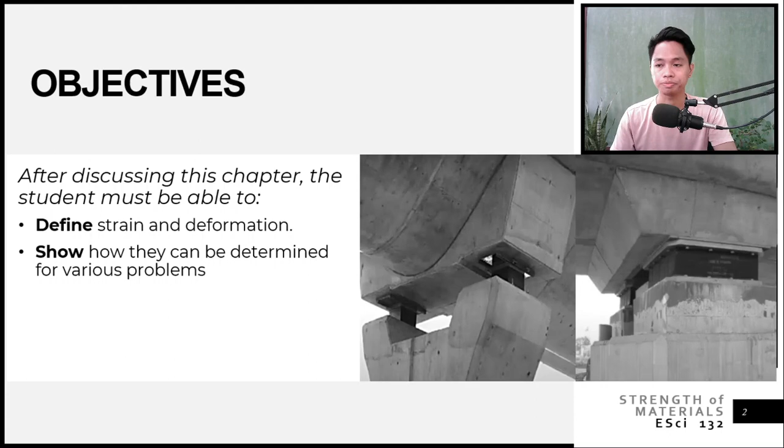So let's start. Deformation and strain: we are going to understand the concept of deformation, which is the main concern of strength of materials, because again from the course title itself, that is mechanics of deformable bodies, diba? So materials deform. That is why we are going to investigate how we determine the deformation of a material, and that would be our basis for how strong it is to resist our applied loads. And then understand the concept of strains.

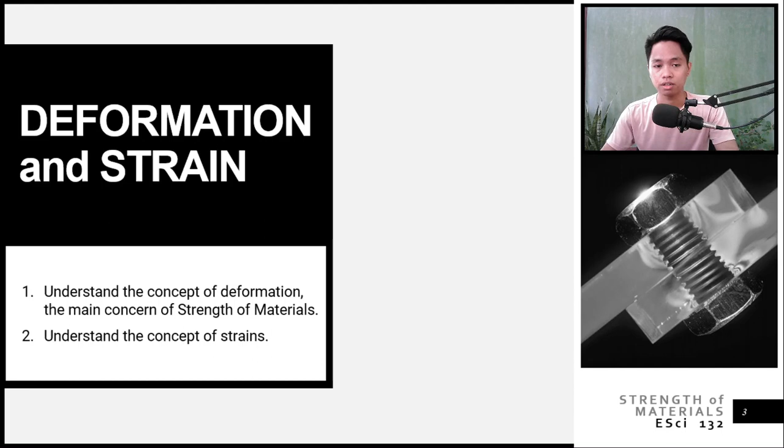Okay, so as per module 1, a deformation occurs whenever a force is applied to the body. Let's talk about deformation first. So a deformation occurs whenever a force is applied to a body. So there might be a change in shape and also a change in size.

So as per module 1, when we apply force to a body, dili lang stress ang iyahang experience. In the previous module, we know that during the application of force, by the formula force over area, it will give stress. The body will experience stress. So dili lang stress ang iyahang experience, but also deformation.

Alright, so the best example for deformation is your rubber band, lastiko. Your rubber band will undergo a very large deformation when stretched. That's the reality. Now, it may be too obvious or too small to be noticeable. For example, this rubber band, kung ato siya inaton, obvious nga mo-deform siya. But for our structural members, like beams and columns,

when we apply loads to our member, there are actually deformations, but they are too small to be noticeable. Di nato ma-observe tungod sa iyang kagamay. So, deformation will not be uniform throughout the body. Thus, deformation may vary along the length of a body or material.

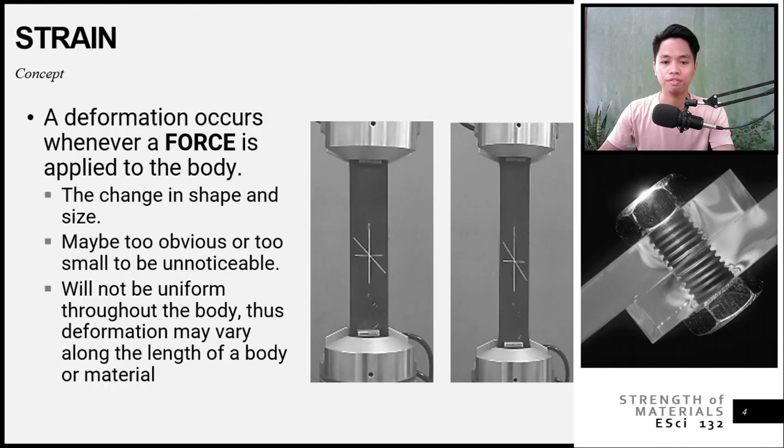So kung ting init, sakto na siya sa iyang sukod. Di ka maglisod og sira. Pero if muuwan or ting tugnaw, maglisod na jud og sira. Maglisod na ka og close kay huot naman siya. So there is a figure, and we have three positions.

We have your vertical, we have your horizontal, and we also have your diagonal. Alright? So kani before ni siya sa application sa ato ang load. So this is before the application of our load. So after the application of our load, kabantay mo nga ato ang vertical line is medyo elongated, di ba? Medyo may taas siya. And ang atong horizontal line is shortened.

So sorry for my voice kung medyo husky kay nagkasakit ko, so medyo lain akong tingog.

Anyway, ang atong horizontal line is medyo shortened, and ang atong diagonal line is medyo milahi siya angle. Mi change ang iyahang direction, and ang iya pod length is mi change pod. Okay, so that is an example of our deformation.

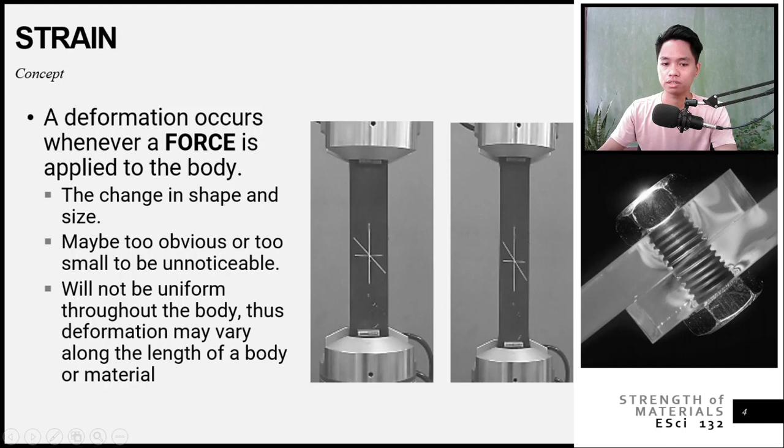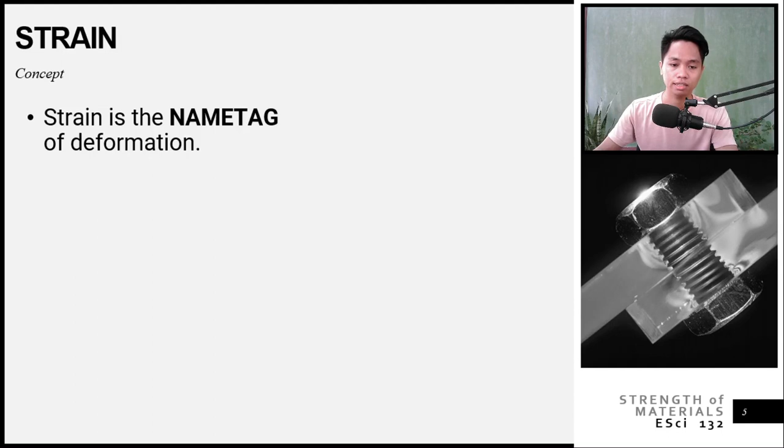Okay, so strain. Now, let's talk about strain. Strain is just simply the name tag of deformation. So, mas dali nimo ma-imagine ang deformation if naa si strain. So, we have two types of deformation. Of course, because sa stress, diba? Sa atong stress, we have your normal stress, and we also have your shear stress, di ba? Sa atong module 1.

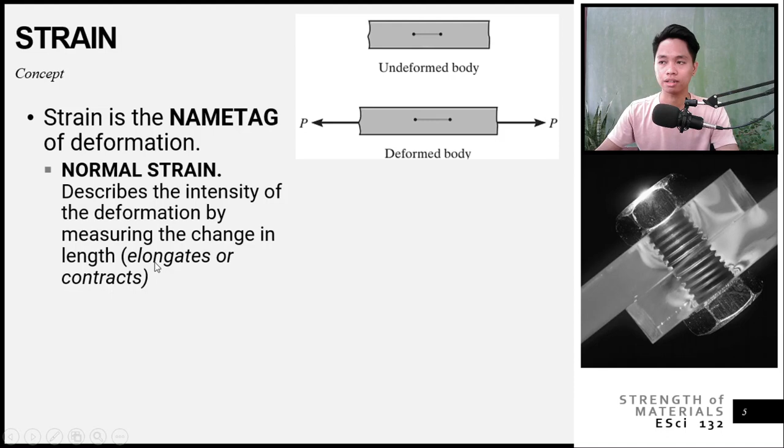Now, diri two types of strain. We have your normal strain, describes the intensity of the deformation by measuring the change in length. So, kung nag-elongate ba siya or nag-contract. For our shear strain, it describes the intensity of the deformation by measuring the change in shape or the angle. So, kung right 90 degrees na siya, pi over 2, nahimo siyang acute angle or obtuse angle. So, change in shape and change in angle. That would be our shear strain.

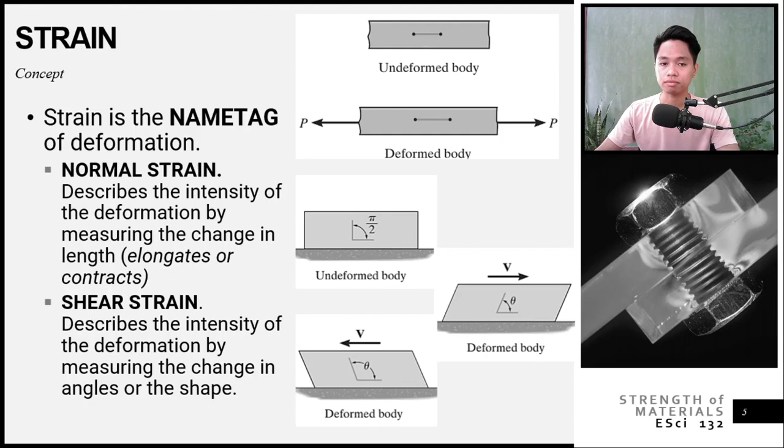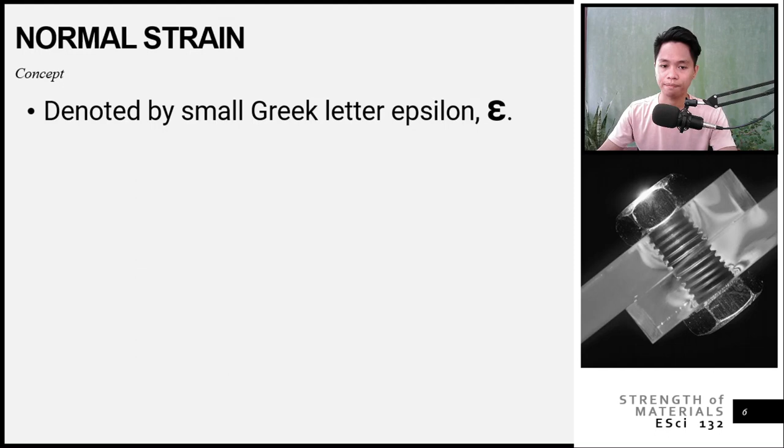Alright, so medyo self-explanatory. So, let's talk first about normal strain. Your normal strain is just simply denoted by small Greek letter epsilon. So that is defined as the deformation of the bar divided by the original length. Mao ni atong working equation for normal strain. Deformation divided by the original length.

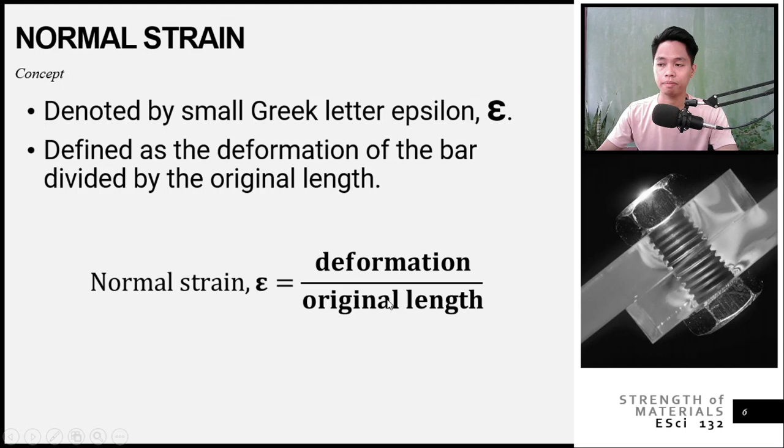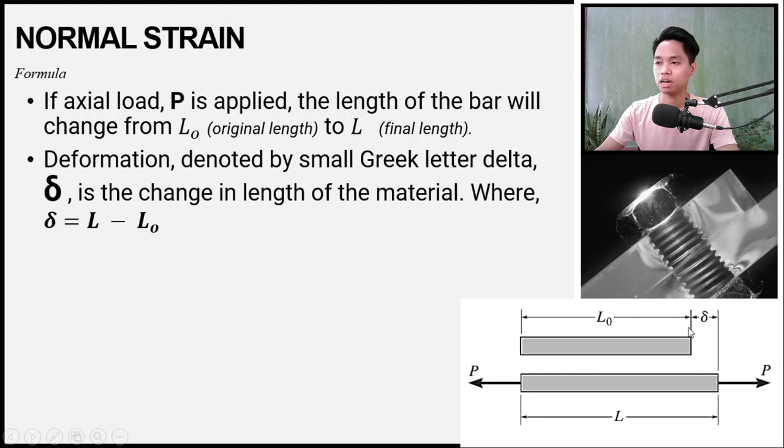So let's talk about the formula. For example, kaning figure sa ubos. Atong original member, L sub O, our original length. Now, after the application of our axial load P, the length of the bar will change from your L sub O, which is your original length, to L, which is our final length. Now, deformation, denoted by small Greek letter delta, is the change in length of the material. So, by using the formula, that would be L minus L sub O.

Okay. So, therefore, our normal strain can be expressed as deformation divided by the original length. So, therefore, strain is equal to delta divided by the original length, or L sub O. And we can express this delta as L minus L sub O. So therefore, this would be our final formula for strain: L minus L sub O over L sub O.

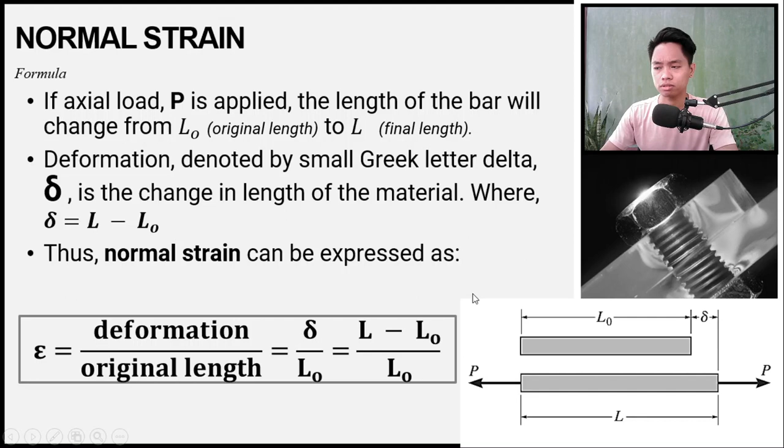Okay. So I hope that's clear. Because the deformation is a unit of length, say for example, meter, tapos ang atong original length is meter pod, diba? So length over length, ma-cancel siya. So therefore, our strain is a dimensionless quantity. Hinumdumi na siya, dimensionless quantity.

Pero sa uban nato problems, makakita mo nga the strain is equal to 0.004 mm per mm. Mao na siya usually ginagamit. Gina-express lang niya nga in every millimeter naay deformation nga 0.004 millimeter. Mathematically, ma-cancel na siya, mao na siya gitawag nga dimensionless. Pero sa atong mga problem, usually nakabutang length per length.

However, it is sometimes stated in terms of a ratio of length units. Say 480 micrometer per meter. Micrometer, mas gamay pa siya sa millimeter. Since strain is a very small quantity, it is usually expressed as micrometer per meter. So, 1 micrometer is equal to 10 to the negative 6 meters. So, smaller than a millimeter.

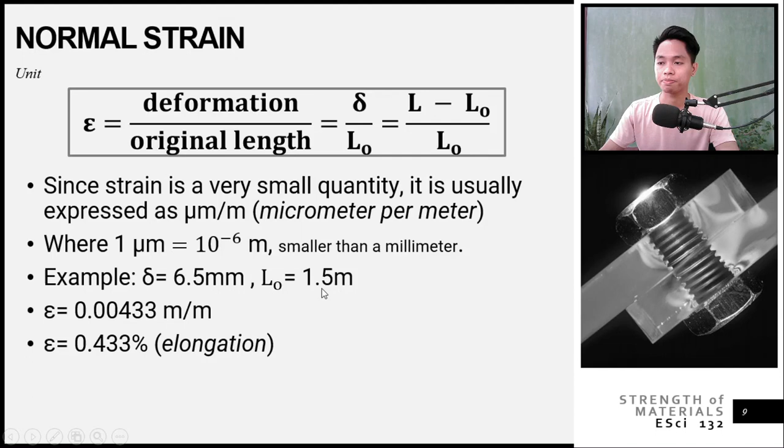For example, we have a deformation of 6.5 millimeter. Tapos, we have an original length of 1.5 meters. So, therefore, we can solve your strain. Your strain would just be the deformation over your L sub O. So, that would be 6.5.

So this would be 1,500 mm. This would be our change. So what happens here, this would be 0.00433 meter per meter. So if we convert this into percentage, usually we express it as percentage elongation or percentage contraction. We just multiply by 100, making it 0.433% elongation, meaning 0.433% is the change in our material. So going back to our 6.5, that is simply 0.433% of our 1.5 meters.

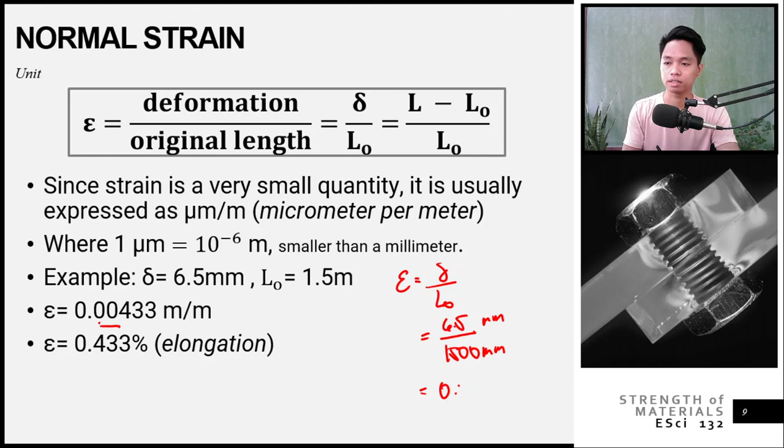So for our sign convention, elongation will always be a positive strain. Just like with stress, tensile stress is positive and compressive stress is negative. The same applies to elongation and contraction: contraction means it becomes shorter, elongation means it becomes longer.

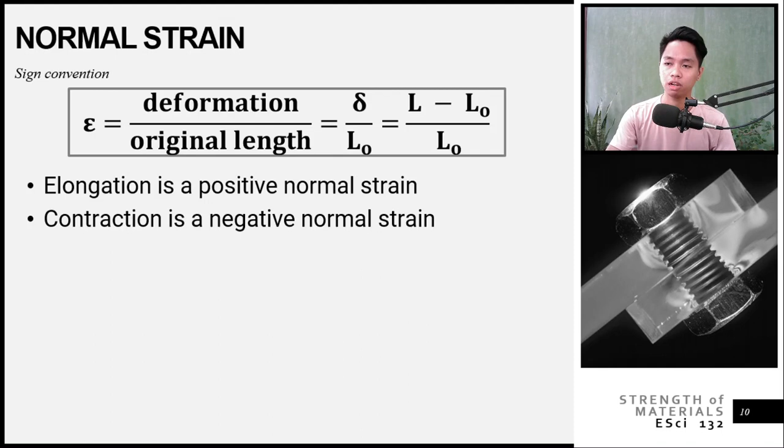Alright, so for our second strain, that would be shear strain, denoted by the small Greek letter gamma, defined as the change in angle. Now you might wonder, we've already encountered a lot of Greek letters. For example, gamma you encountered last semester as the direction angle, specifically the direction angle for the z-axis. There are many uses for gamma, it can also be the unit weight. But again, in every course, every subject, every field, you have to know what the specific denotation means. So for strength of materials, we will be using gamma for shear strain.

So shear strain is defined as the change in angle that occurs between two line segments that are originally perpendicular to one another. If it's a rectangle, that is at 90 degrees, so that's pi over 2. Since strain is a dimensionless quantity, we will be expressing angles here in radians, which is a dimensionless unit for angles. So 90 degrees means pi over 2.

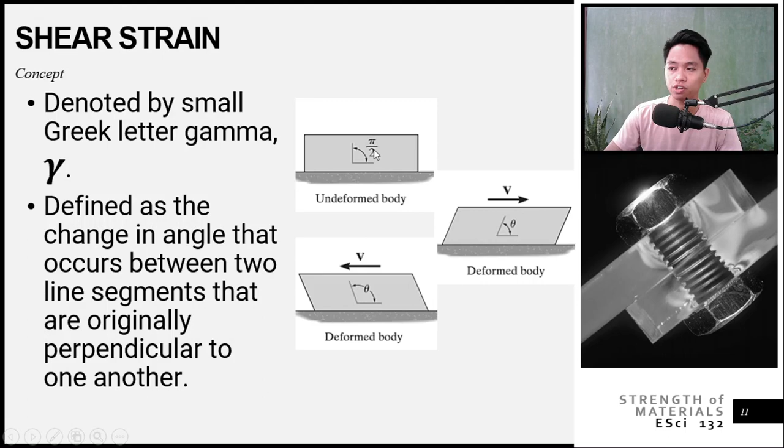Angles are always measured in terms of radians, a dimensionless unit. So using the above figures, shear strain can be solved mathematically as pi over 2, our original angle, minus the final angle, which can be smaller or larger. So our formula is gamma equals pi over 2 minus theta, where pi over 2 means 90 degrees, or they were perpendicular before.

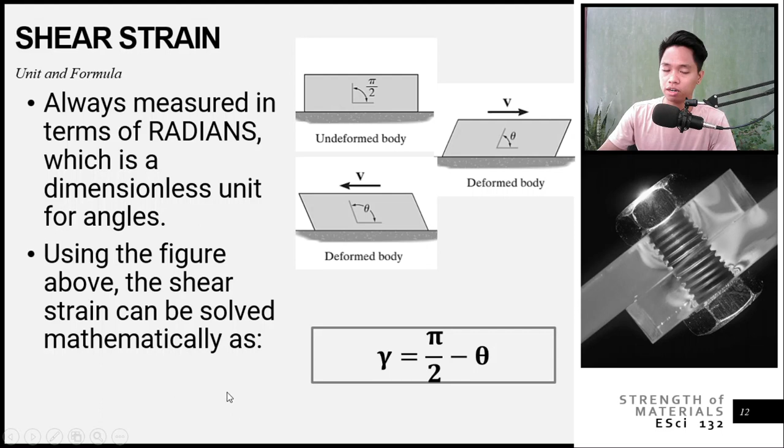For our sign convention: if the shear strain is positive, meaning the angle becomes smaller, your theta is less than pi over 2 - this is our positive shear strain, meaning it becomes an acute angle. For negative shear strain, the angle becomes larger instead.

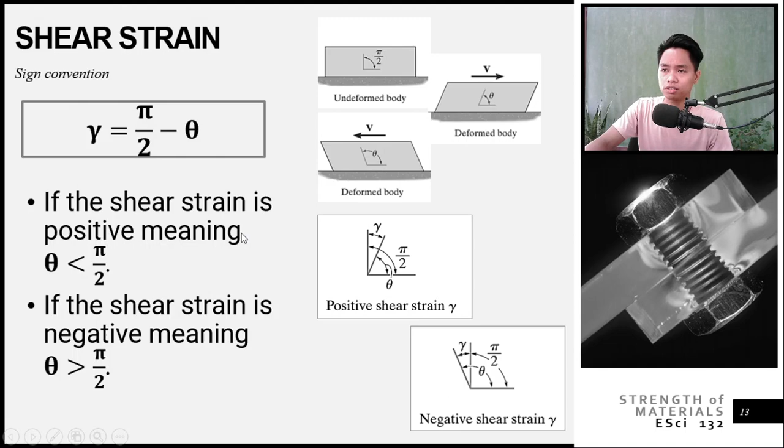I hope this is clear because this is in preparation for module 3. This will just be a very short discussion.

Okay, so that's it. I guess that's the end of this video, a very short one. I hope this is clear for this module.